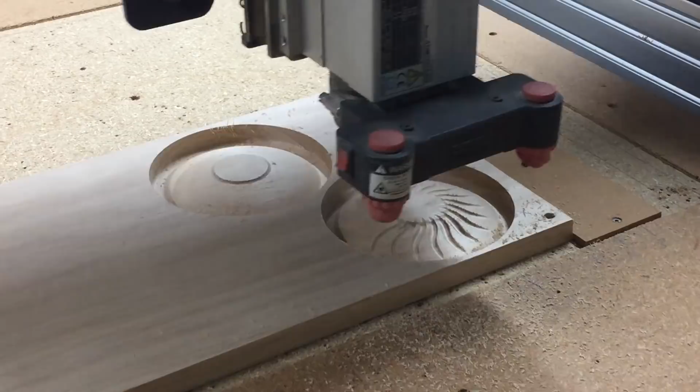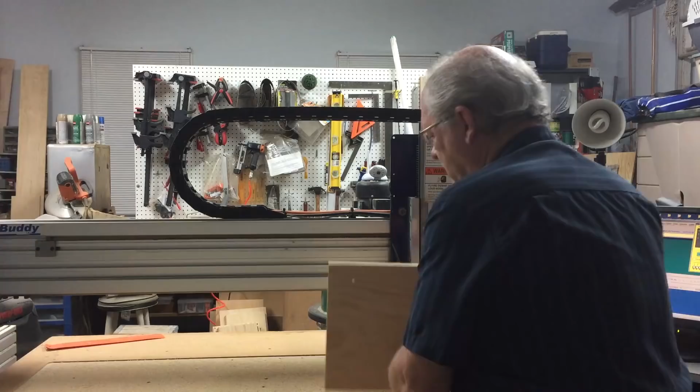Okay, I've machined the first side of the shelf for the cake pedestal project, and I've got 4 alignment holes that are drilled all the way through the board and into the spoil board. I'm actually only going to use 2 of these corner holes for alignment in the spoil board, but I wanted to mention that you can learn more about the two-sided carving techniques. There's various ways of doing this. The important thing is you get perfect alignment from front to back.

Now, I've made these 4 holes just simply for convenience, so I don't have to run a separate project to drill holes just in the spoil board. I go ahead and drill all 4 of these holes so that I've got my 2 diagonal holes already drilled, both for the board and the spoil board itself.

You can learn more about this technique in the PDF instructions that are included with this project, and the alternate technique. Also, there's some great videos on two-sided carving on the Vectric website in the support section. You can do perfect alignment for any two-sided project. It's not a problem, it's just there's different ways of going about it, and this is the way that I've chosen to do it.

Now, I'll give you a close-up on how we use these small dowels inserted into the spoil board and in these corresponding alignment holes here in a second.

Okay, I'm going to go ahead and flip over the project board so I can carve the other side of this shelf for the cake pedestal project. So I just want to make sure that before I flip it there's no stray fuzzies or anything that would interfere with getting that board sitting nice and flat again.